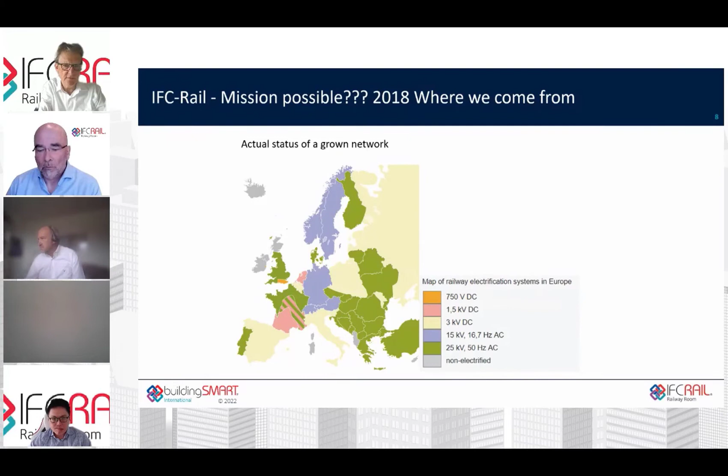So we started in 2018 in very cold Beijing. As you know, I'm coming later to the stakeholders, so China was one important stakeholder in the project. That's also the reason why the kickoff meeting was in Beijing. It was a very fruitful meeting, we brought the team together. You see it here, quite some people from Europe and from China, and it was the first seed for the collaboration we ran then for 4 years.

What was expected from us? You see the circle of the digital twin, and you see what the final goal is expected from the railway companies: to find a really life cycle data model for railway infrastructure, starting from design till the final operation and the rebuild, then to when the infrastructure is not used anymore.

So to the dismantle section, that's what I want to say. Then we said, okay, what we can really do is going into design and construction, because on the maintenance level you have also other systems coming in, which is the network topology system from railway, which is very important for operations as well.

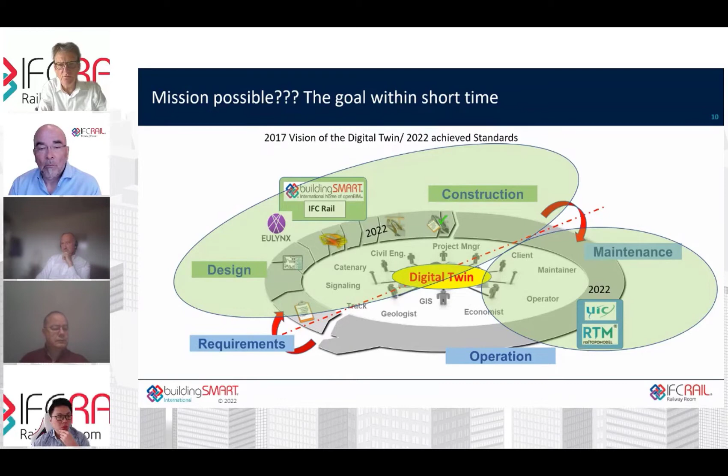And there we seek the collaboration together with UIC, with the railway system model, railway topo model, so that we have our schema also ready to use together with these other schemas in operations.

What did we do in phase one till April 2020? You see it here. It starts on the left side, requirement analysis. So what is really everything that is required as components or constructions in a railway infrastructure.

We brought that in a database, so that we could say, okay, that's all what actually are the units or the important building parts in a railway infrastructure.

Then the data requirements report, which was the part of how this data works together or exchanges. The conceptual model report is how this data is also used into business requirements, mapping diagrams, which finally led to a harmonized UML report, to this candidate standard on the right side.

So that's what we all prepared for phase one till April 2020. Then we started phase two.

And phase two is then really putting this schema live, getting it approved, bringing it to the audience, testing it also together with software vendors. We had a very intensive part in the second part to test it with software vendors.

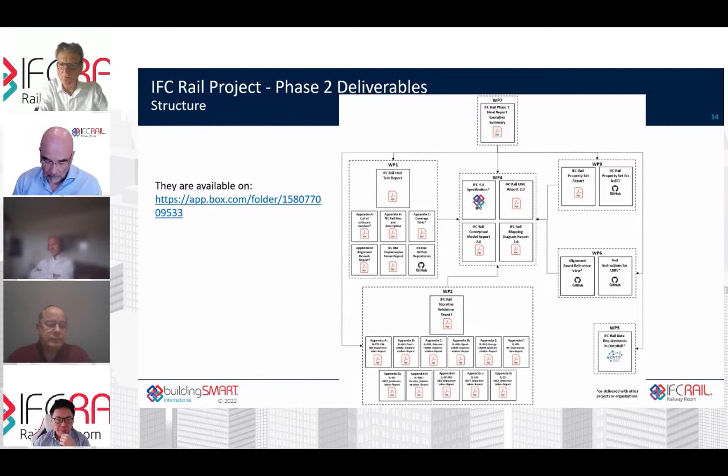And work package 6 is then the alignment-based reference view. So the first MVDs we start now to define and to bring live as well.

Work package 7 is this report, the final report, executive summary. It's a 25-page paper, which you can also find on the website, where you see the content of the paper, where we covered everything, linked together with the details and results behind, on a schema, or maybe buildingSMART will organize it on the website as well.

But this is what finally has been delivered so far, and I hope that this schema is now going into life and will be used quite frequently and on a large base worldwide, because then we know that our work was quite successful and can be used. Okay.

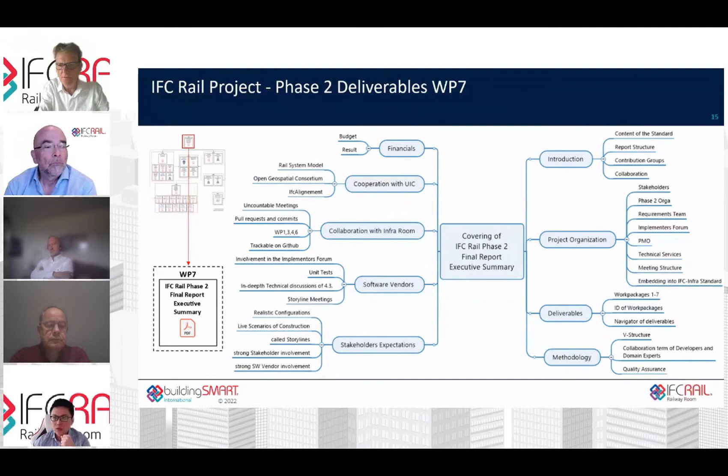Thanks, Christian. So I'm going to talk about work package 1. Work package 1 and work package 2 are both based on collaboration with software vendors.

We have 2 phases to collaborate with software vendors. The first phase is about making unit tests and asking software vendors to test the unit test cases. The second phase is work package 2, about storylines. In order to collaborate with software vendors, we established the IFC Rail Implementers Forum.

You can see the IFC Rail Implementer Forum report in this work package. Just about unit tests - a unit test is about testing one or a few features in the IFC standard and their implementation.

We have 6 basic features, as you see in this slide: alignment with cant, linear placement, and so on. In total, more than 130 IFC 4.3 reference files were created. Just from the railway perspective, 55 IFC schema issues were resolved, and also uncountable implementation issues were resolved.

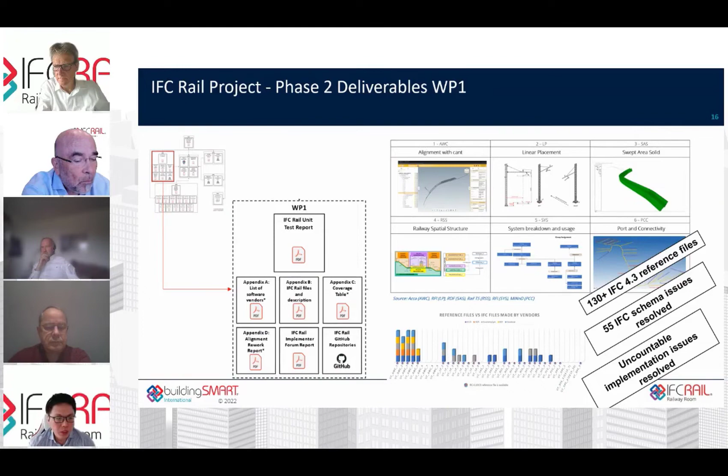And then I will hand to Guy to talk about work package 2. Good morning, Guy Pagnier speaking.

What we decided to do in this phase 2 is to satisfy the stakeholders' expectations, which was to produce or test all these unit tests in railway business orientation, and make sure that it would work internationally and be based on a robust process.

The first thing we decided was to have a data set from the stakeholders. As you can see on the right side of the document, there's a table where all the stakeholders decided to present storylines based on existing projects. The objective was to test all the unit tests within this project.

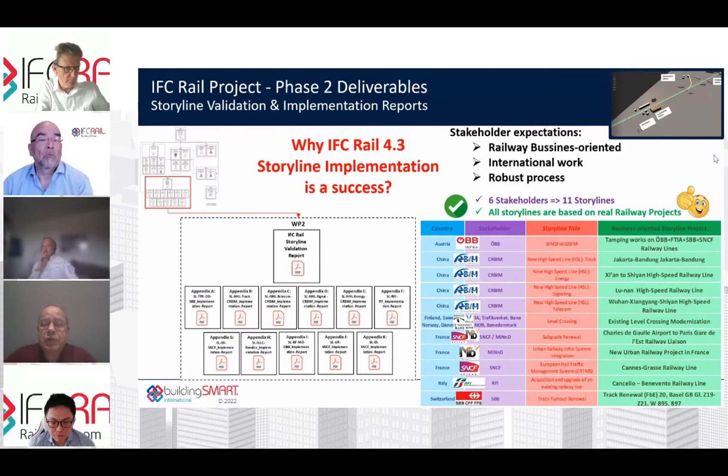We made sure each stakeholder was able to provide all the right information to satisfy all the basic information we decided to cover within this project. The first one, as I said, was to have all storylines based on real railway projects.

Our objective was to satisfy some key subjects. The first one was, of course, the rail domains. On the upper right side you can see the domains. Through the work carried out in the first step with the unit tests, we made sure the storylines would cover all these rail domains: track, energy, signaling, telecom, and alignment.

We decided also to integrate or interface this project with some infra domains, which are described in all documentation provided by the test leaders. For each storyline, we had a specific test leader responsible for organizing their own team with rail domain experts and technical experts.

On the bottom part, on the right side, we decided to cover the use cases, which were the ones selected in Düsseldorf, the 6 first use cases and the key ones for railway projects. On the bottom part, it was to cover the main phases between the plan phase up to the maintenance and operation phase, through the building phase and the intermediate and final detailed design phase.

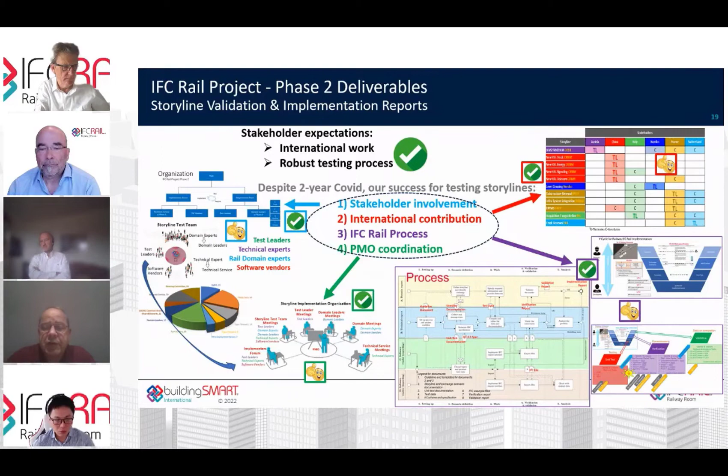As she explained, we had a lot of meetings to make sure all the unit tests worked, and we transferred this information into the storylines through a consensus process we decided to have with all the test leaders. On the table on the right side, upper part, you can see all the countries were involved in the storylines, which is very important to keep this international work. The process was based on the one described on the bottom part.

Through these tables, which are of course not readable, it's just to show that we covered the various unit tests presented, and that was the next step she talked about. When the unit tests were ready, we tested them in the real world through the various storylines, and that was the first objective we decided to have.

As you can see on the table on the right side, nearly all the tests satisfied our requirements, or maybe the stakeholder requirements, except one, due to the fact that one test leader had to leave the project before the end of the project.

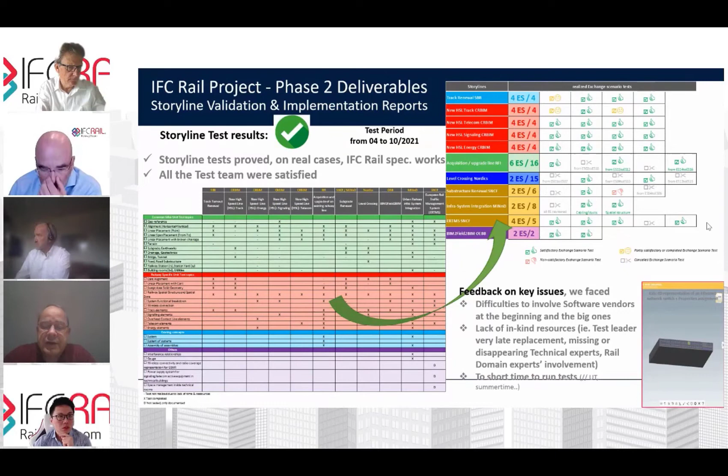The difficulties we faced at the beginning were mainly the software involvement, the big one. They understood the necessity to come into the project, and we were quite satisfied. Nevertheless, it was at the end, so we couldn't do more than what we planned. It's also sometimes the lack of in-kind resources, because we have a lot of work to do, and all this project is very costly, and it's necessary to prepare the future. It's really necessary to have railway experts and technical experts, which are not so much in the market. And the last point was to run so many tests in a very short period, around 6 months, less than 6 months, to do all these tests.

What I can say is that all the stakeholders were satisfied by the result of the storyline. As you can see in this slide, on the bottom part, we have the storyline validation report, covering and describing all the works carried out by the test leaders for all the storylines, to make sure we were covering all the subjects and topics. And on the right side, it's all the 11 storylines with some specific focus on what they covered.

It's very interesting to know that throughout all the storylines, we covered some typical works carried out in railway networks, like turnout renewals, damping, subgrade renewal, upgrade and modernization of lines, level crossing for some countries, substructure and cabling, ERTMS, which is the railway telecom system, new one. I can say it was successfully managed, and all the stakeholders were satisfied at the end. And I wanted to thank the test leaders, because it was quite difficult to carry out all that in a short term, the domain experts involved, all the technical experts and the stakeholders, of course, for the finance, plus the software vendors who participated. Thank you very much.

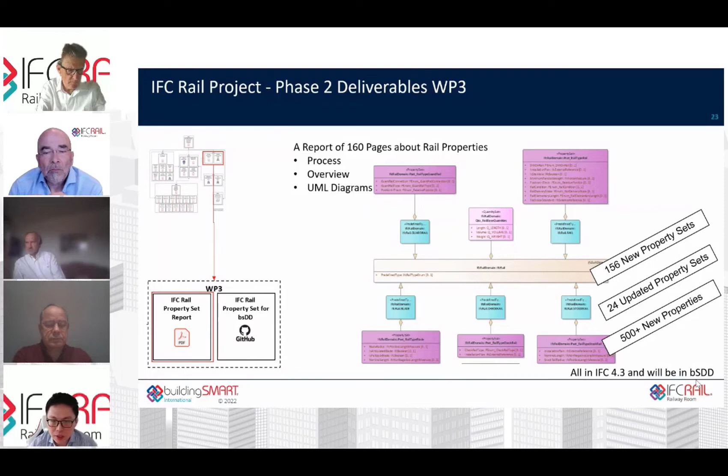So we could go to the next. We have generated this IFC Rail property set report, to describe these property sets in UML diagrams. In total, there are 156 new property sets defined by this project, and 24 existing property sets updated, and in total, more than 500 properties added into IFC 4.3.

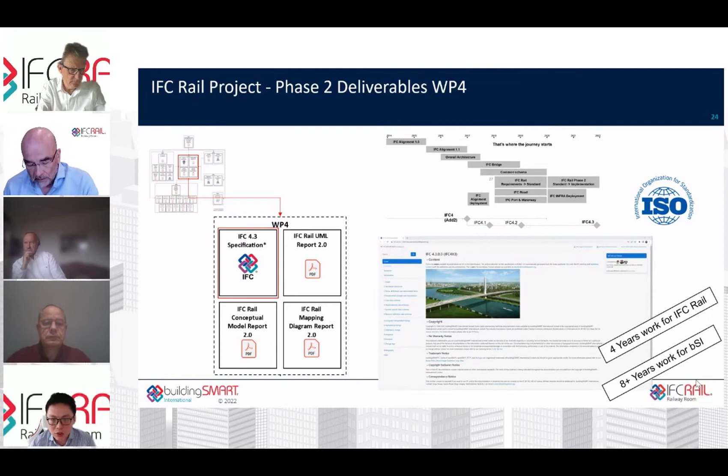Okay, and work package 4 is about the standard. So everything else, all the other work packages, are actually based on this work. This is definitely joint work, because as you know, IFC 4.3 is not just for railway. It has many concepts from other infrastructure domains, and also a lot of fundamental concepts from building, from the IFC resource layer. So this is a collaborative work with InfraRoom and also with the BSI central team. At the end, as you probably know, this standard has now been delivered into the ISO process.

Next. And just based on this specification, we updated some reports for our stakeholders, but I think this will also be useful for the general public to understand the information in IFC, especially the railway part in IFC, because UML is always easier to understand than Express, which is the language used by IFC to define the schema.

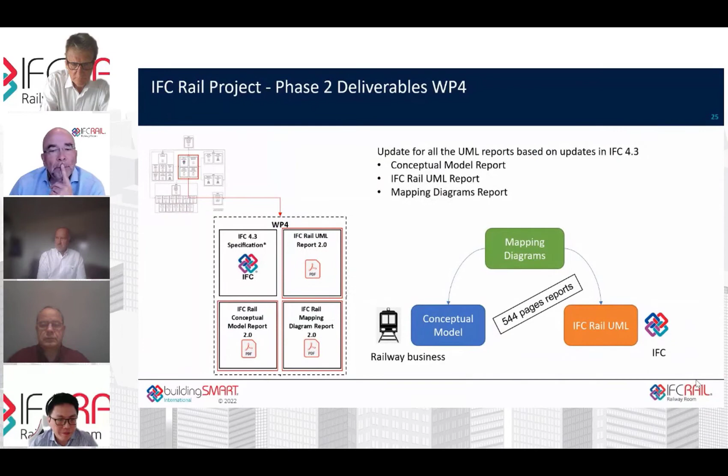So we have these three UML reports. First is the conceptual model report, which is the model defined independently from IFC. Then we have this IFC Rail UML report, which is kind of like a UML counterpart of the IFC specification. Then we have this mapping diagram report, which defines how the conceptual model is mapped to IFC. So these are all updated versions of these reports. Okay, now we'll hand it to Winfried, talking about work package 5.

Okay, thank you, Chi. Work package 5 was about looking beyond the box, how can we get in touch with other initiatives in Europe and above. We were very much connected with UIC, the Union Internationale des Chemins de fer in Paris.

They have a good overview about projects in the world and Europe, and of course have their own capabilities to make solutions. One was the OntoRail system, mentioned before, which tries to connect different models of rail in a semantic way, making it possible to compare the different models and bring them to an overlap so we always see how things are going.

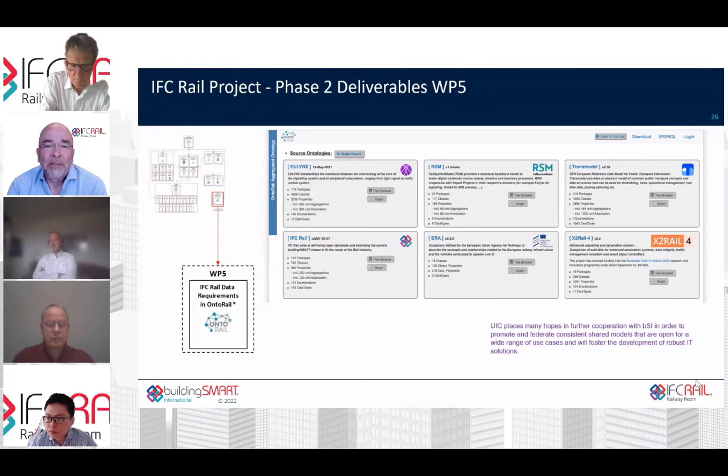That's also the connection to EULYNX, the standardization project for signaling. Christian mentioned before the rail system model, which is more than a topologic model to build railway topology and railway infrastructure networks into a generic system. So that's all, thank you.

Okay, again me. Work package 6 is about MVD and test instructions. This work is led by the InfraRoom project, so IFC Rail project joined this process to provide the rail input. We defined together an MVD named alignment-based reference view, and also defined the test instructions for this alignment-based reference view for certification.

There are 5 exchanges assigned to IFC Rail out of 13 total exchanges in this MVD, and these 5 exchanges have been delivered to the InfraGitHub repository. There's also draft documentation generated for this MVD, now pending for review.

Just about the size of this MVD, it's significantly smaller than IFC 4.3, with 343 entities instead of more than 800. There's an expert panel meeting this afternoon at 2 o'clock, a joint expert panel with InfraRoom to talk about this MVD. If you're interested, you're very much welcome to join.

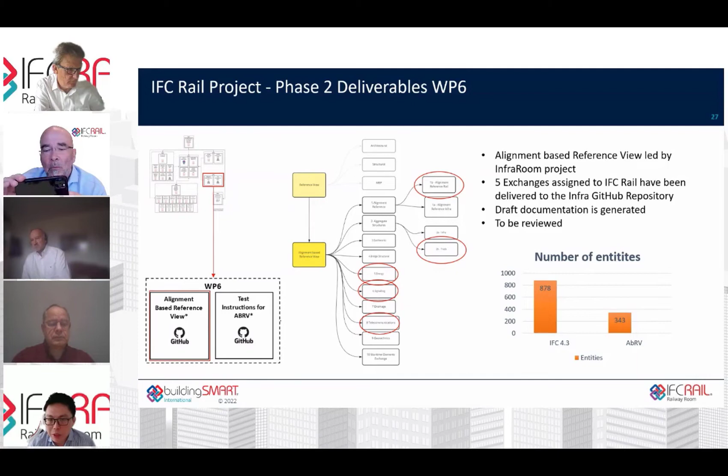The next slide, still about this topic, is about testing instructions. From IFC Rail perspective, we defined the test instructions for these 2 exchanges in this committee setup, and now we have delivered 13 test cases to this InfraGitHub repository.

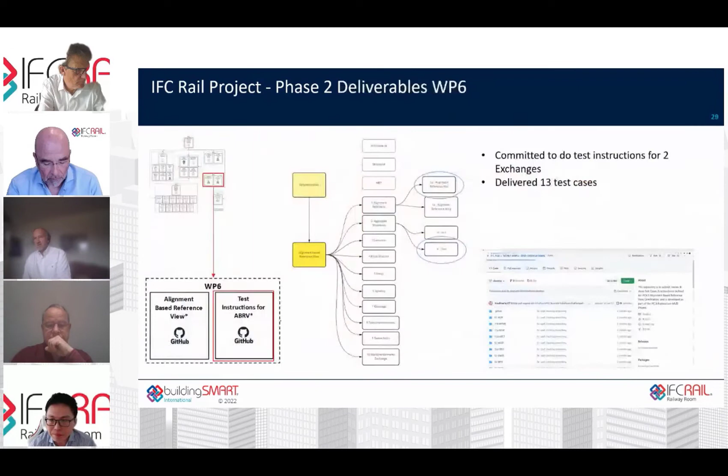As a general overview, the whole journey up to now, starting from 2018, was about 4.4 million euros, contributed by our stakeholders. I'm focusing here on the cash contributions only.

As you've also heard, there are endless and countless days in meetings from the so-called in-kind contributions, experts dedicated by our stakeholders to the project. We just gave up to count the hours of these meetings, so this is just focusing on the cash here.

As in phase 1, we were able to manage project phase 2 in time and largely in budget. Of course the budget was tighter here, and I think it was one of the few occasions that COVID helped a little bit, where we could actually reallocate travel budget to tech experts. The reason we slightly overran was mainly that against our initial focus on rail specific topics, we also had to deal much more than expected with influences from schema changes and harmonizations. But by and large, with strict budget control, we were able to run the project within budget.

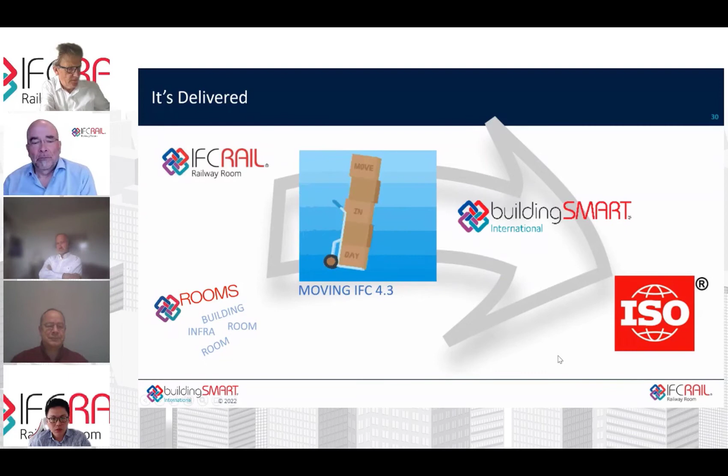You can imagine there is a big backlog, and we have selected out of it, let's say, two goals. The first is to bring everything we have learned in project phase 1 and 2 into processes that could be reused for a lot of things. At least we want to achieve that we can bring through these processes two of the use cases we have developed so far.

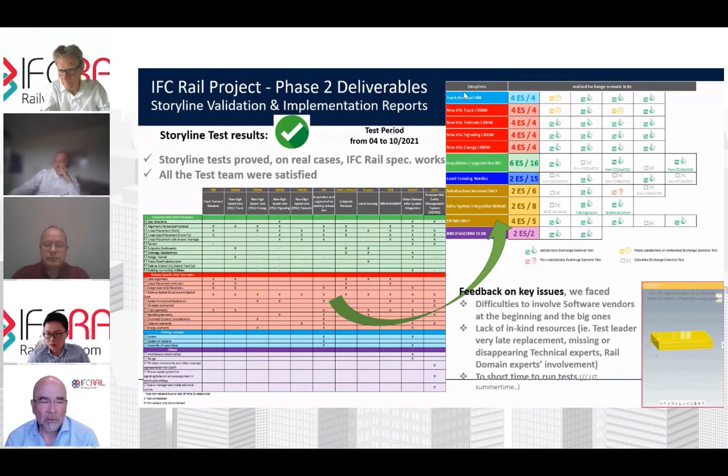We can say that we have not only been doing new things in this storyline testing phase, but also maintaining things. Like the tamping machine control, BIM-to-field-to-BIM, was a maintaining project so far. Exactly.

Okay guys, it's 11:49. So if there are no further questions, you have a longer coffee break, I think. Sheila, what do you say?